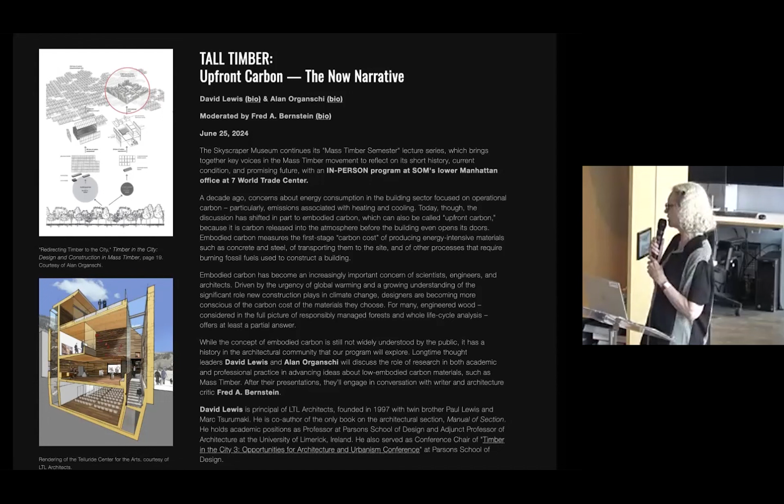I'm the founder, director, and curator of the Skyscraper Museum. We're really delighted to be here at SOM tonight for the fifth in the series of our Tall Timber lecture series, our semester of timber. This evening, Tall Timber, Upfront Carbon, the Now Narrative, brings together two great experts and academics who have investigated in their research, spoken at myriad conferences, taught hundreds of students, and organized academic conferences on mass timber and beyond that on all kinds of biogenic materials with low carbon footprints.

And I'm not the person to talk about this. The order of the presentations will be Alan Organschi and then David Lewis. So I will introduce them, and there'll be a moderated conversation, which was going to be in person with Fred Bernstein, a journalist who has covered mass timber and embodied energy, which is really his thing at the moment.

A kind of obsession with Fred. But Fred came down with COVID last night, so he is going to be here as a big head on the screen, and we hope all the technology is going to work out just fine. But I'm going to introduce Fred a little bit more when he comes onto the screen, and in our post-production, all of these things will be smoothed out.

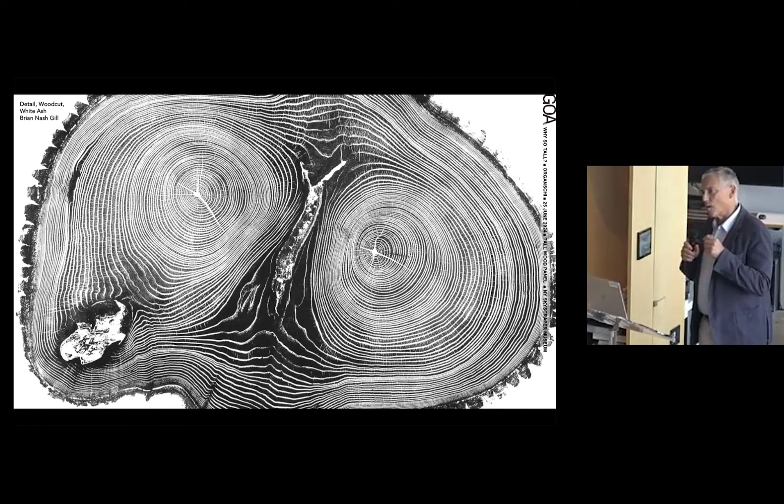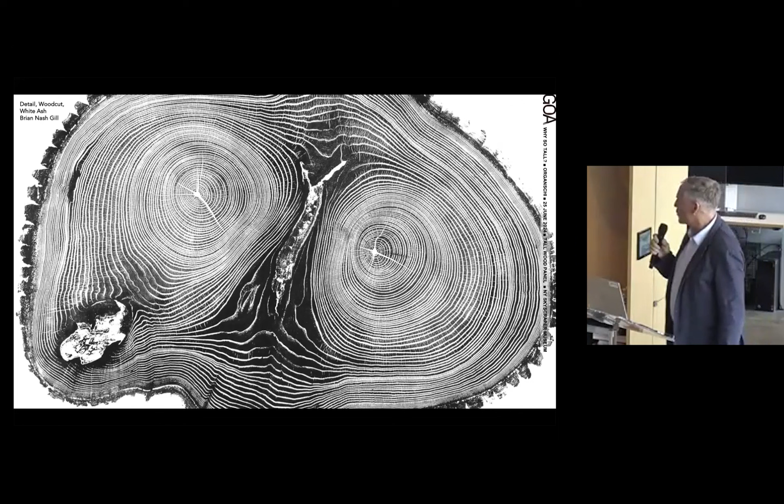We could talk about the architecture of wood. I'm not going to talk that much about it, but this amazing woodcut of an ash tree from Brian Nash Gill tells us a lot about two things. One, the sort of biophilic response we have to this natural material - we read the age of the tree, the disturbance in the forest as a kind of history, the flaws that we all experience. I just had knee surgery, so I'm feeling very akin to the broken knots and things like that in the tree. But also in this, we can read all of the reasons why wood historically has been left behind by 20th century engineers and architects because of the flaws and the lack of predictability and uniformity. So I won't really talk too much about that architecture.

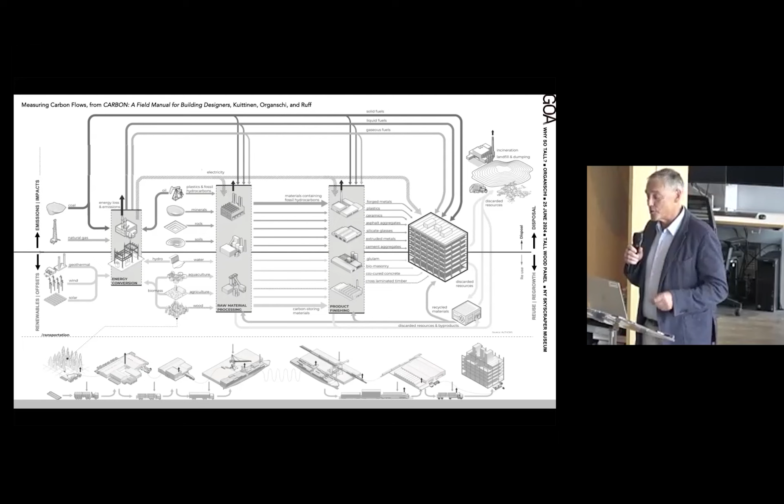And I'm going to talk a little bit about my architecture because, as Carol notes, we're always trying to sell ourselves a bit. But building architecture is a vehicle for some of these ideas, an important one. What I'd really like to talk about today is the architecture of the system that produces buildings and a host of environmental impacts throughout the building life cycle, from the extraction of materials from the Earth's surface or deep in its lithosphere, to the disposal of a building at the end of its service life and what happens to that material and all the energy that went into it - the so-called embodied aspects of building.

But first, I think I want to frame this question. This is Tokyo. Tokyo, as you know, is the largest population of any metropolitan area in the world, 39 million people I think. But an industrial ecologist will tell you that it's also the largest stockpile of human-made material in the world, which is an amazing thing to think about, because with the making of this giant city comes a host of impacts that we really haven't thought too much about. Carbon emissions is one of them, but we can trace it from the beginning, to the conversion of land and ecosystems to non-biomass surfaces, impervious surfaces, all the way down.

If we looked at some of the chips or materials going into the control systems in our buildings, we might find potentially human exploitation, possibly even child labor and exploitation.

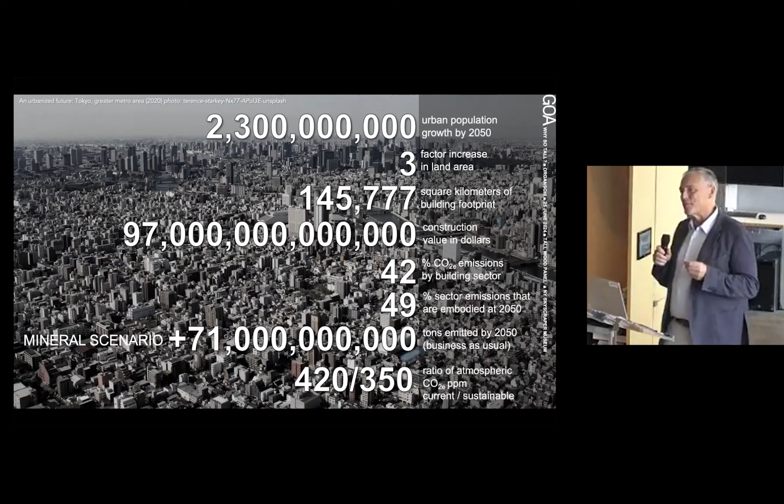In the process, we know now that building sector activity produces 42% of anthropogenic emissions. And by the way, that number has been climbing as we assess all the various levers in the system that create it.

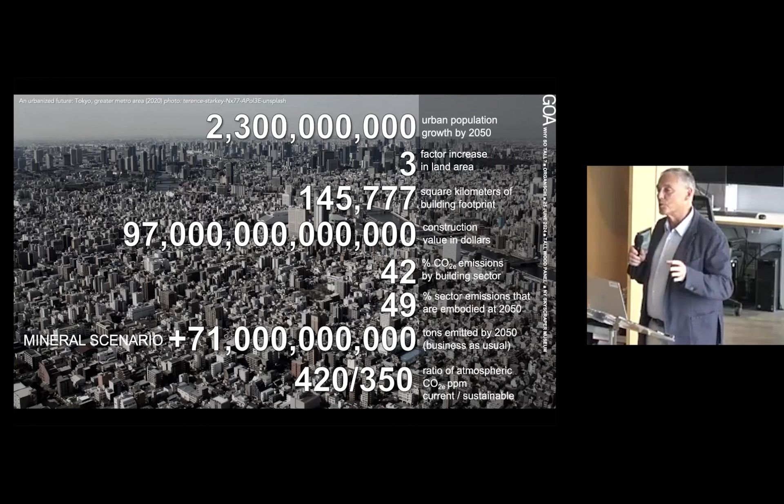I'll get more into this, but half of those emissions will be associated with embodied emissions by 2050, according to Architecture 2030. That's carbon dioxide alone, not counting other impacts, amounting to 71 gigatons of carbon. That will blow us through all the guardrails we've imagined for ourselves in terms of carbon impact reductions.

So this is a story about two landscapes: the forest, and its relationship historically, since the agricultural revolution, to the growing cities of human settlement.

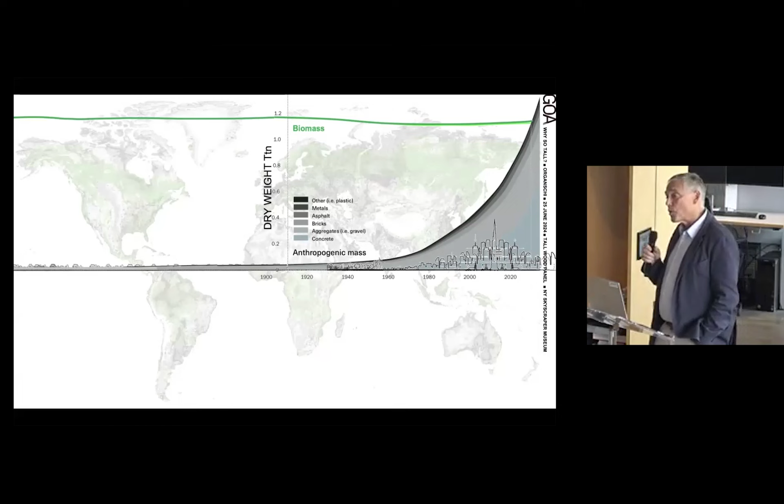If we think about Tokyo and all of that material, we can note that 2020 was a kind of red letter year. It was the point at which anthropogenic mass, all the products of the technosphere, now outweighs the Earth's biomass. That's a pretty important point.

We're also creating a lot of emissions when we dig this material out of the earth or scrape it off the surface. That's kind of what I want to talk about. But emissions are really a proxy for a lot of different kinds of impacts.

That number I mentioned, from a study by Architecture 2030, is that by 2050, 49% of building sector emissions will be associated with the embodied phase. Let's talk about what that is exactly: all the stuff that goes on in a building that's not operational energy consumption.

Here's one of the impacts created by that. Across the building life cycle, 23% of all the emissions we produce in the world are associated with the things we specify, the materials we specify in our buildings.

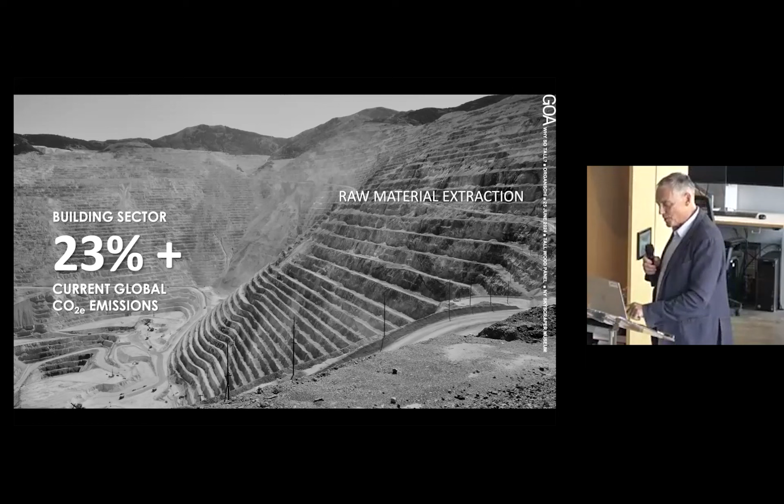Raw material extraction, material handling and transport, processing and manufacture. This is from David Plowden's amazing photo essay on Bethlehem Steel production in the 1960s.

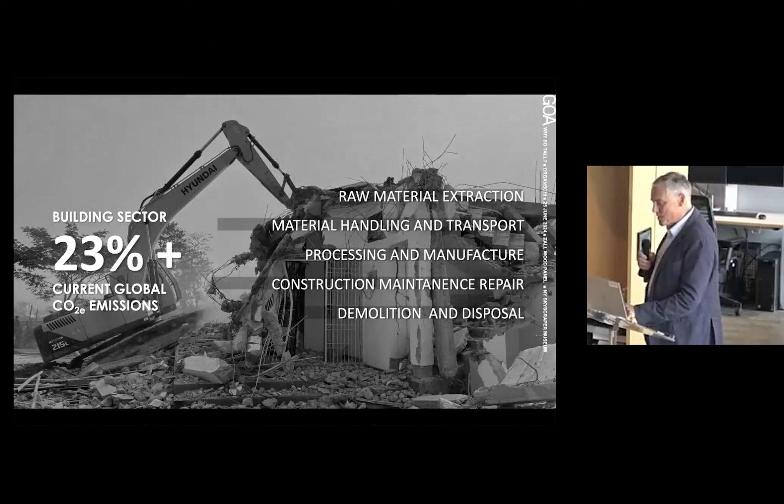During construction itself, and then renovation and repair, and finally demolition and disposal. These are all the kinds of forces behind the so-called embodied emissions of carbon.

So these are the operational emissions. The minute we open the doors and turn on the lights, the first time we use the building, we see a sort of slow emission of carbon. Even in the lowest so-called net zero energy buildings, we're going to have some emissions.

The problem, as Carol pointed out, is that at the beginning there's a carbon spike when we actually build the thing, extracting resources and transporting and processing them. Then it flattens for a while with embodied emissions, but the building needs to be repaired and serviced, and those emissions occur again. At the end of life, there's another burst of emissions because of the demolition and disassembly processes.

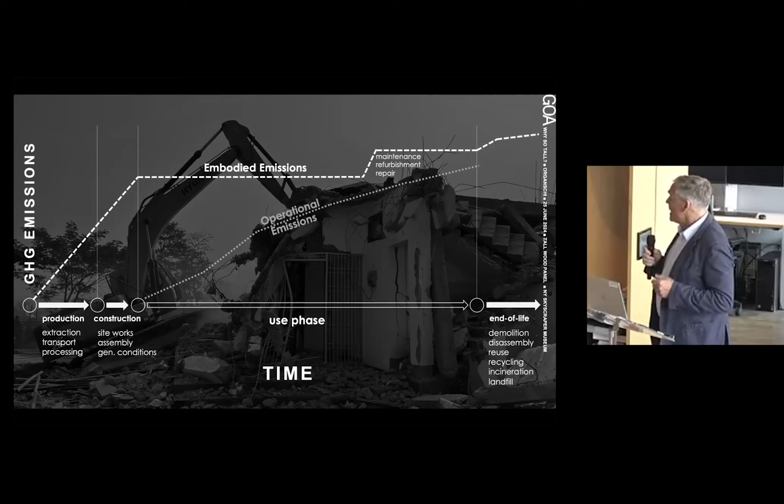So in a way, we can be really efficient about operational emissions, but we'll never catch up with the debt we owe the environment through this embodied phase.

We're pretty familiar with this diagram from the IPCC. We're charging toward our 1.5 degree guardrail. If we keep building and doing all the activities we currently do, in a business-as-usual scenario we'll blow through it, and the Earth will be a relatively difficult place to live by 2100, not too long from now. Of course, we talk a lot about decarbonizing different sectors, which will flatten that curve out, but we're still going to overshoot.

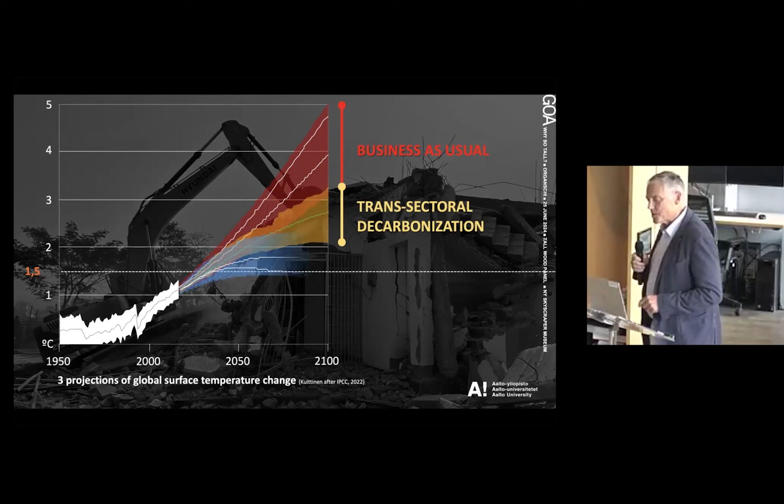So the question is, how do we produce negative emissions? How do we use a lever like the building sector and building activity to reverse this trend?

So the first thing is we need to really understand carbon literacy. I wrote this book with a couple of colleagues—I hope somebody's read it, or at least someone was willing to buy it. But it really tracks the question of where carbon is lodged in the Earth, both in things that existed naturally and in the future use of carbon-laden materials in building.

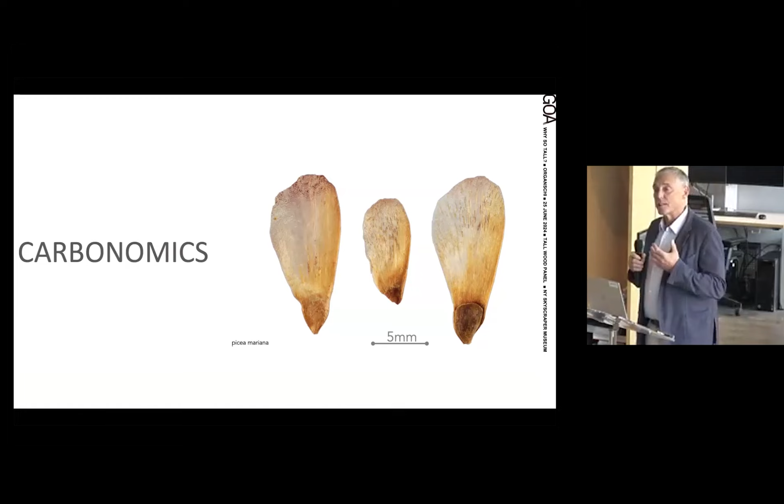This brought us to a real question we've been exploring through building. I'll get a little into my practice here—this idea of carbon as a kind of currency, where it's no longer dollars, renminbi, or euros, but rather the flow of carbon is actually an exchange that's a really important aspect of how we conduct our work.

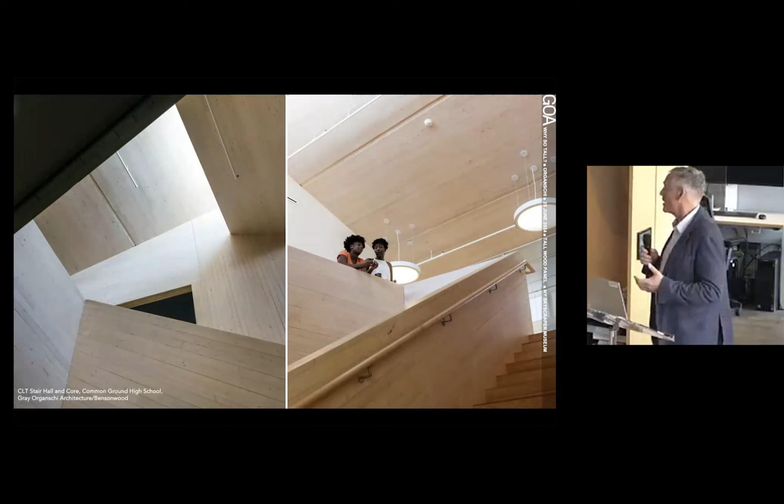So we built a school in New Haven for inner city kids at a public charter school, entirely out of CLT and bio-based materials. We learned a lot about the capacity of industry to prefabricate flat pack components, and got great feedback from the kids in the school—they said the building smelled good, which I think is a pretty good criteria for design.

Egress systems were made out of timber rather than steel pan stairs. In the end, the school was a pretty successful place, serving 20,000 people coming through the New Haven Ecology Project, along with the 250 high school kids who work there.

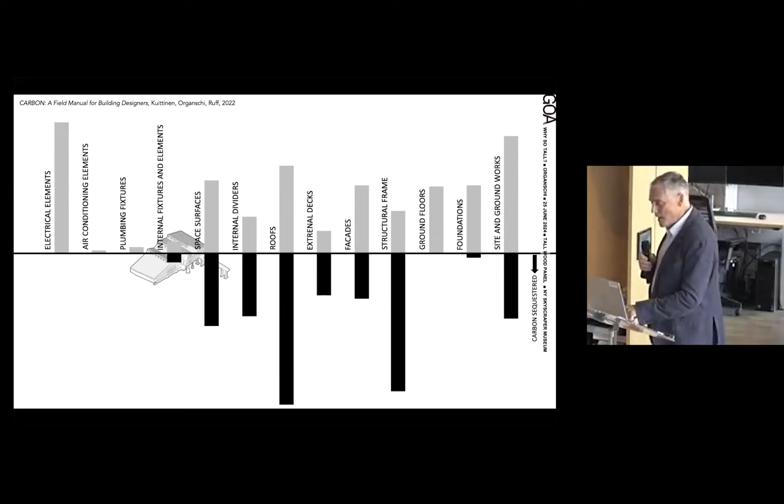I won't go into that too much, except to say that really the way we think of buildings as systems is how we specify components. When you look at it not as form but as a set of impacts, you start to see where emissions occur in the things we specify, and consider where there's capacity to store carbon using the natural photosynthetic process of forest growth—we start to really understand how buildings can be agents in the reversal of climate change.

With this student, a young guy, we did a study of how much carbon was lodged inside this building based on the bio-based materials. We found it was essentially about 100 cars worth of annual emissions offset by the carbon stored in the wood of this building, which I think is an important insight.

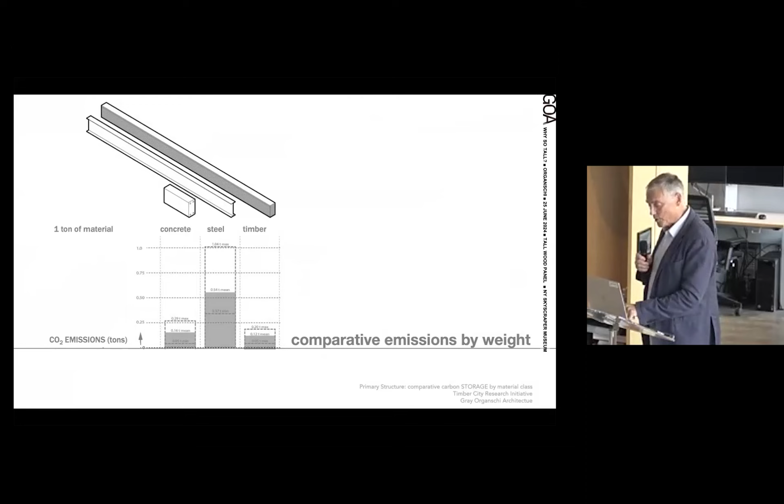If you start to scale up, you imagine how that goes. For comparison's sake, we often talk about the comparative weight—carbon dioxide emissions per weight of material. But if you take into account the relative strength, or the strength-to-weight ratio of these materials, you see that wood will get you 4 times as much value, plus has lower emissions. So we start to see great benefits in emissions reductions from the use of wood when it's done properly, from regeneratively managed forests, of course.

The storage piece is a really important thing that became part of our Timber City research initiative—unlike mostly concrete and not at all steel, we can actually store carbon in these kinds of structures for as long as they're protected.

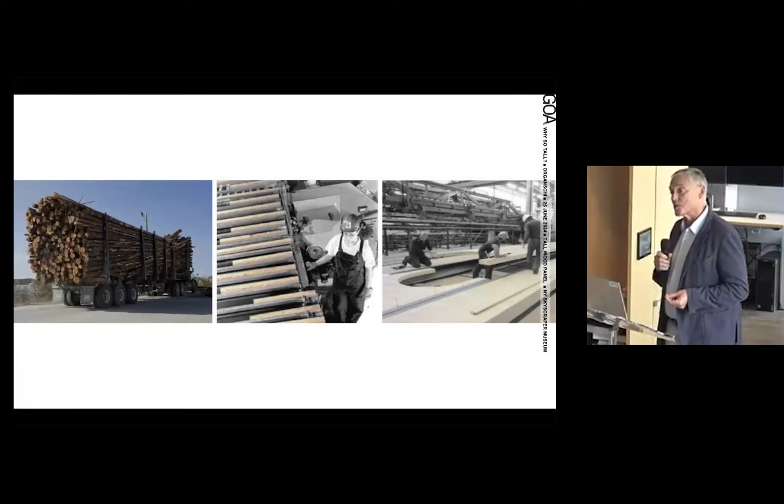It's kind of amazing that chemical adhesives, combined with a technology called finger jointing, which is about 100 years old, let us take little sticks of wood—higher yields from managed forests, smaller trees being cut—and produce really big cross sections.

What's more, we can distribute the different lamella, or layers, within that based on their capacity for structural resistance. So the really good fiber, the high-grade fiber, gets moved to the tensile and compression edges of a beam, let's say, and the cheaper stuff gets lodged in the middle. So now we're actually truly making a better beam, and we've known how to do this as long as glulam has been made. And of course, we know it's very amenable to digital fabrication systems.

And we even know that we can start to substitute different species that are underutilized, like beechwood, in this case of beechwood dowel joinery for a 5-story building produced by Blumer Lehmann in Switzerland.

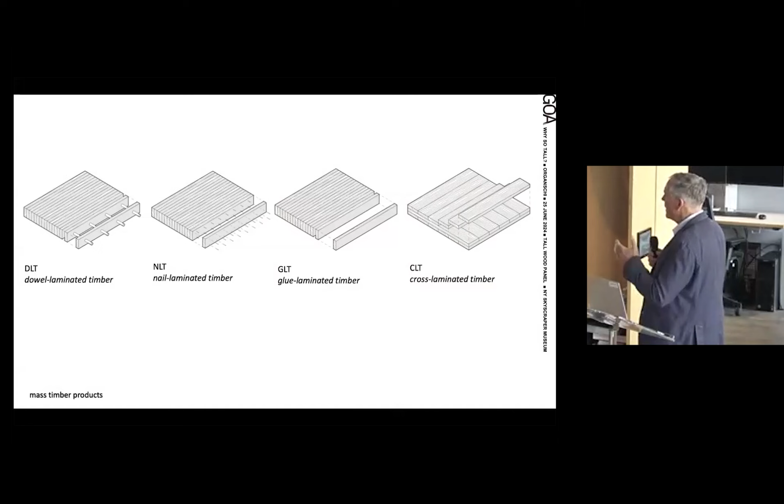We can start to actually choose different species based on their properties from the forest and apply them to tall buildings. So think about it: it's a tectonic system where we have a bunch of sticks, and we found different ways to put them together to make pretty large components.

And tectonic systems of building, we've allowed them by building code. The IBC allows buildings with different kinds of encapsulation requirements up to 18 stories, which is 3 times what we were allowed to do with heavy timber prior to the IBC code adoption. So the question becomes, if we can do all this, is building wood skyscrapers what we should be doing? That's kind of what I'd like to talk about today.

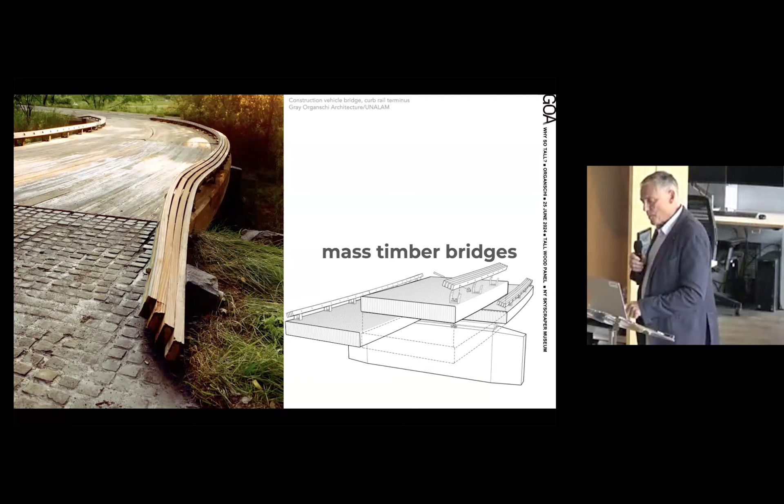And that's where I get to talk about my practice a little bit, which is that we've been working on mass timber for a pretty long time. This bridge we designed was made in 1996, and it was a first experiment with just the industrial techniques required because we were building the bridges ourselves and we had to figure out the logistics.

That became a series of experiments through different kinds of bridges, again self-built, self-performed, where we were really focused on how do we move this stuff into the site, how do we put it together, how do we ensure that it's going to be durable, how do we maintain structural integrity in really slender, light systems.

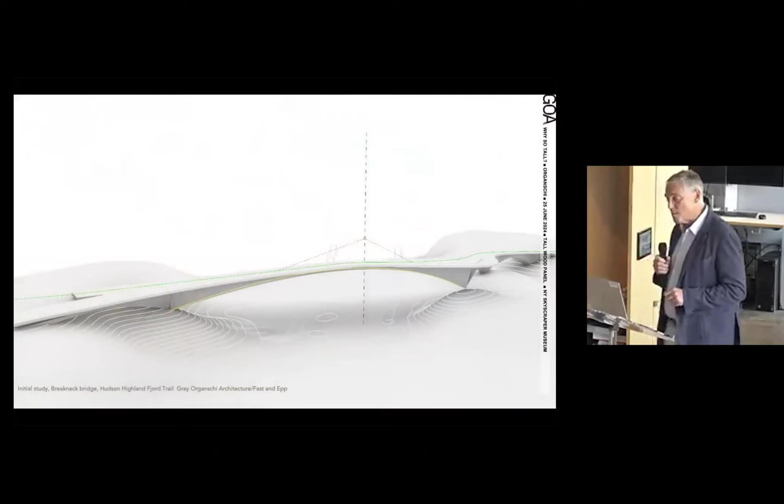But are monolithic and therefore fairly weather resistant over time. And then that's turned into bigger projects working for a sort of alphabet soup of different agencies along the Hudson River, crossing the Metro-North Railroad, using a hybrid system of timber, steel, concrete, knowing full well that that is really part of the sort of transitional aspect of engaging these mass timber products.

And houses have been important to us as a way to test systems of building, from the cabinet detail, laminated curved laminated wood, to exterior cladding and structural systems, how we retrofit buildings, which is such an important part of the decarbonization process, to urban buildings that were really unused and neglected, and turn them into rich, carbon rich and architecturally rich places.

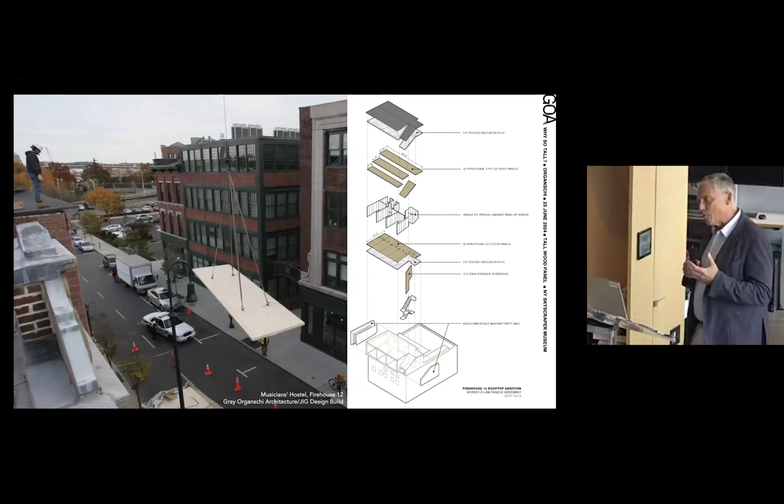But also then, what does it mean to move those same materials into the city and handle that without creating a huge amount of disturbance? Or in the case with the Acme Lofts, which we worked on with Jeff Spiritos, who's here tonight, the idea that this super light, stiff material can actually reinforce an unreinforced historical masonry building, just using a shaft that's threaded down to its foundations to literally double the capacity of a historic building in terms of housing.

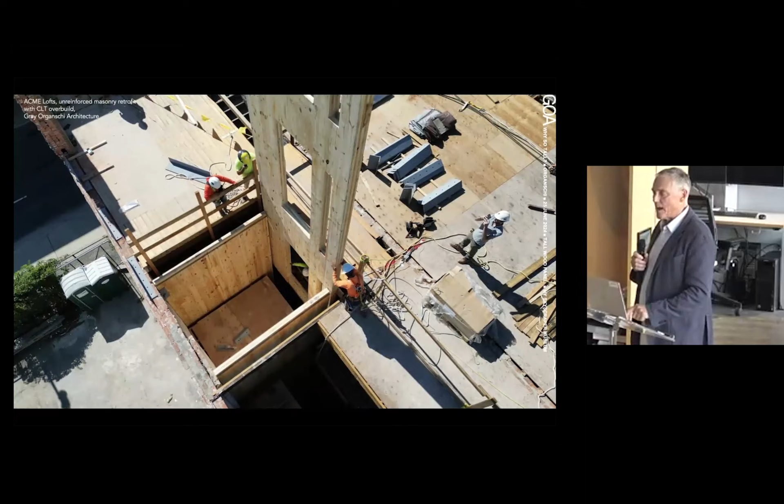And then the question, of course, when you start making housing is, can you make affordable housing? I'm jumping ahead, sorry - you got me under pressure, Carol, so I'm trying to move fast.

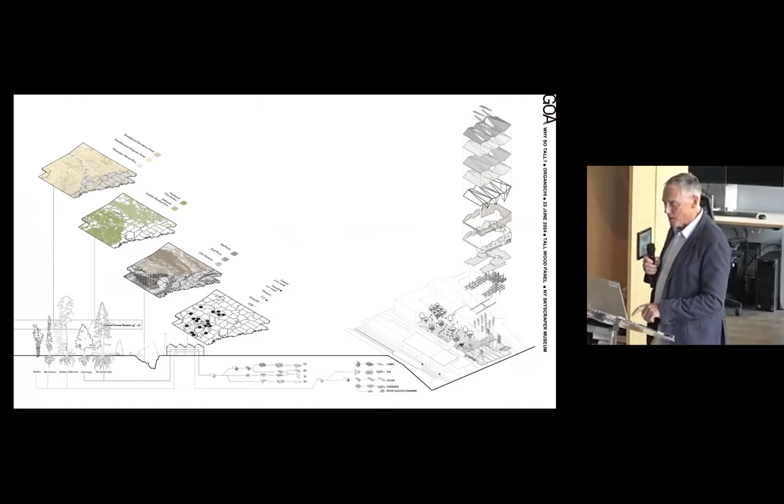This is an important piece, and I'm going to really let David talk about this, but the buildings that we make, especially for educational institutions, become test beds for both education and industry, and that's a really important piece. But it has to address not just the building itself and the cool forms and techniques that we use, but rather the entire system, as at the Anthony Timberlands Center in Arkansas, where we looked at the entire material shed that could possibly serve the building.

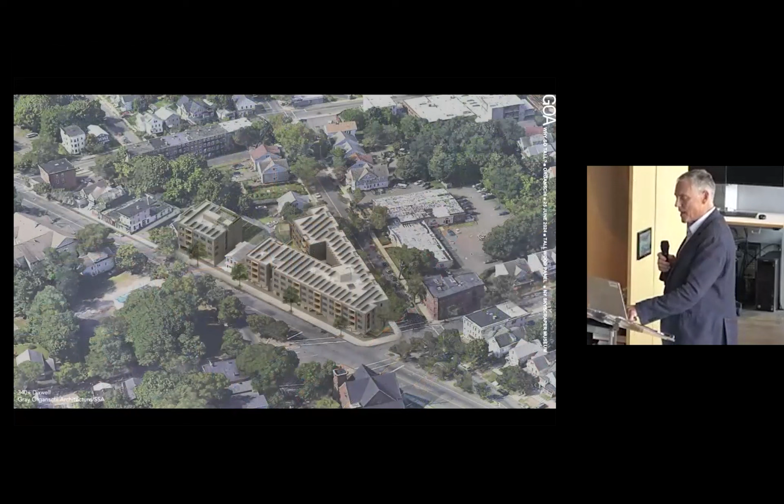And also revitalize a moribund economy in the country, in the state. And affordability, also working with Jeff Spiritos in New York and his great analysis for the US Forest Service of comparative costs of building and how to make a building entirely out of bio-based materials and make it affordable for a community much in need of housing. This project's going to be finished shortly, and it has been a test for a lot of reasons, which I won't go into here.

And then finally, at a more national scale, we're working in Thimphu in Bhutan, working with the government to try to not just make a building, but to refashion the entire supply chain based on the sustainable use of resources. And how to do that and be respectful of a very strong architectural tradition, working with regional architects, national architects, and really studying how we might create cascading products coming out of the timber, the sustainable timber industry, to really create a whole host of parts of the building assembly.

And this requires us to analyze how much demand there could be in the future, and also how much capacity the forest management units in Bhutan have to produce timber, because that's a really important part of it.

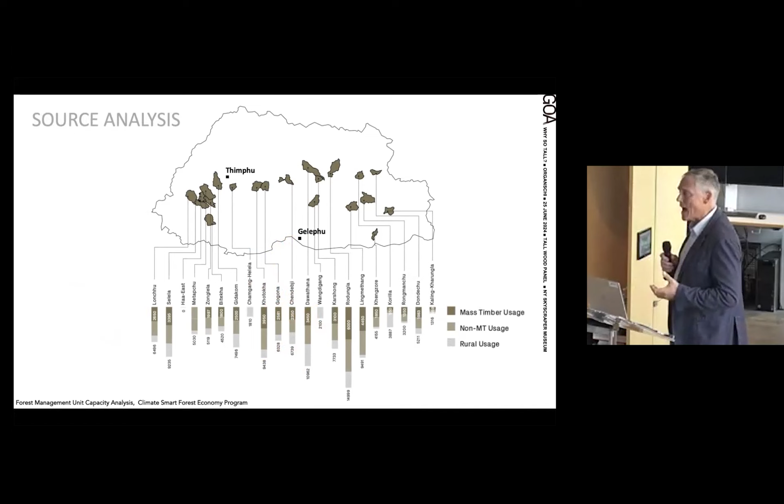We have to be sustainable systemically. And so that brings me to the vision we've tried to promote: that there is a synergy between these once antagonistic systems and landscapes, the city and the forest.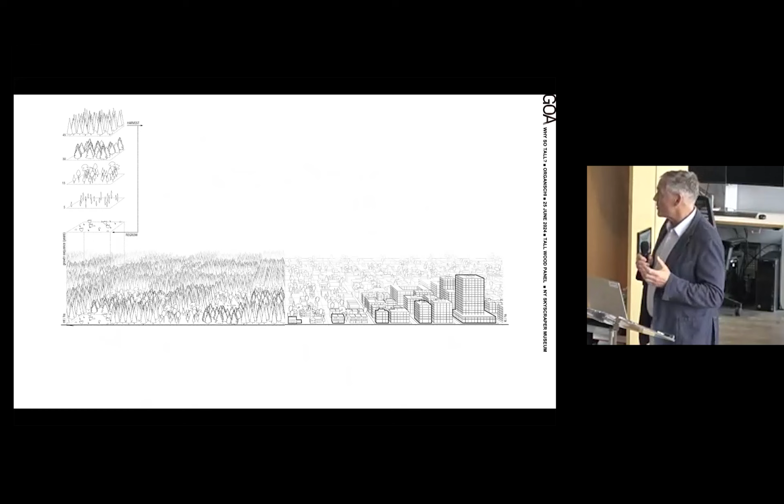We can build synergies first by understanding regional forest differences and the species coming out of them, and as stand successions follow a disturbance like wind throw or a harvest, how the wood grows and what species grow at different stages, and then how we might track the carbon stored and potentially the biodiversity benefits coming out of it.

And how we might map different products from the forest and this forest dynamic into both low-rise building, which we already know how to do pretty well, but more importantly into mid to high rise building, where we start to see real benefits of this transfer of forest carbon into these durable consumer products that we call buildings.

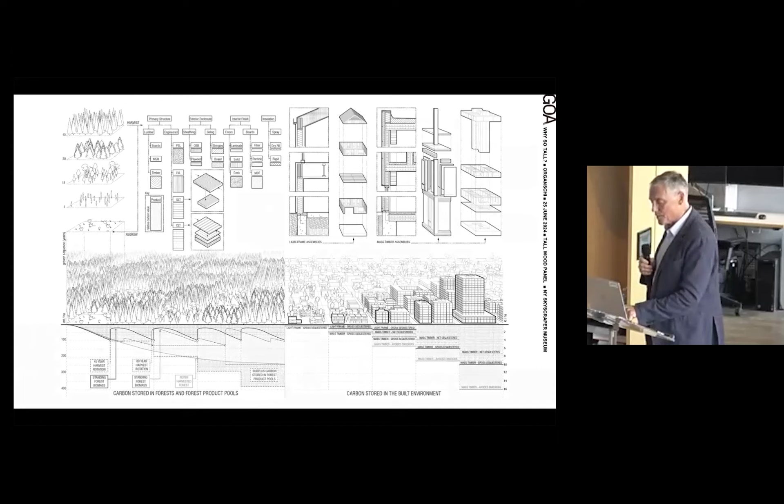So what we're really positing is that there exists scientifically, experientially, a metabolic, circular, and regenerative system called forests. Can we mimic that? And through really good quality building that's carefully assessed, can we also produce a metabolic, circular, and regenerative geotechnology?

It's a bold move. I don't think it's necessarily going to happen. I think a lot of people are concerned about the health of forests for good reason, worried about the overconsumption of wood to build cities.

We know the carbon sink globally is collapsing for a whole host of reasons. Wildfire is the most journalist-friendly aspect of it, but there are many other reasons for forest loss—agricultural conversions are raging across the Amazon and Congo, mining and mineral extraction is happening.

Forest product use represents a part of it. About 20% of global forests are used for wood products. 50% of those are actually domestic fuel. So that's something to keep in mind.

Suburbanization is obviously a huge force in land conversion. And finally, climate change is doing it too.

What's important as we look at that—we need to understand a recent study from my colleagues at Yale and the Applied Science Synthesis program showed that if we stop cutting, the carbon sink collapses, because of all these other forces. If we don't cut and see these extreme disturbances, it collapses even faster.

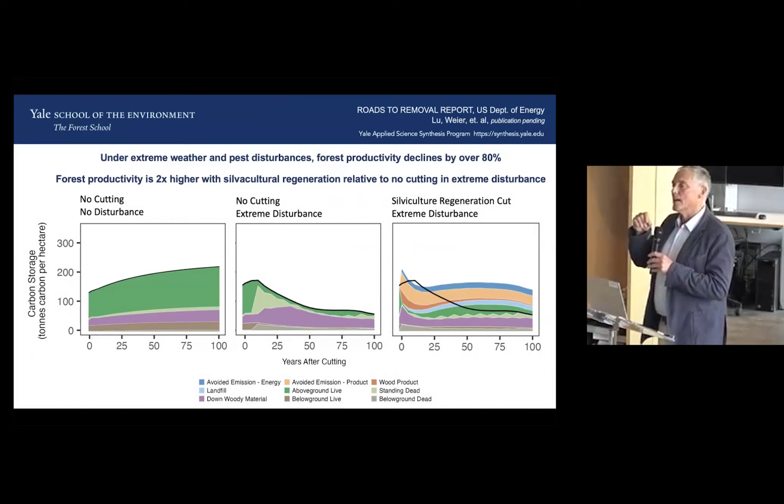So this is the no-cut, no-disturbance scenario, which actually doesn't exist. This is no-cut, extreme-disturbance, which does exist. And then this is the regenerative cut, which is really the only way. The focus on existing second growth forests, restoration and management, really is the only way to maintain the forest carbon sink.

We've got to get rid of industrial forestry—it's not the way to manage forests. Unfortunately, it's the way we pretty much cut forests for the current mass timber products we use. We have to think instead about what the forest can offer us on a sustainable level.

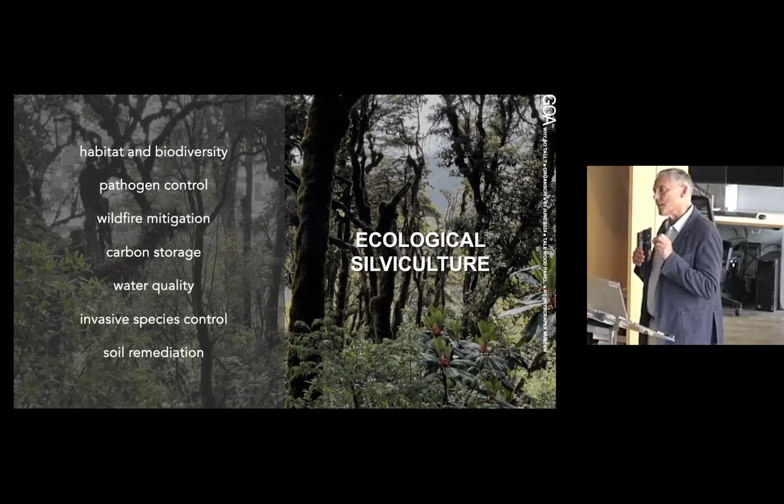We have to think about all of the forces and goals of forest management—habitat and biodiversity enhancement, pathogen and invasive species control, carbon storage in the forest, water quality improvement, soil remediation—all of the things ecologically minded foresters are thinking about, we can think about in the specifications of building components.

And we need to teach our students how to go into the forest and understand that, even though they may be architects or builders. We need to carry that through the entire process, from the sourcing of that material to the making of buildings.

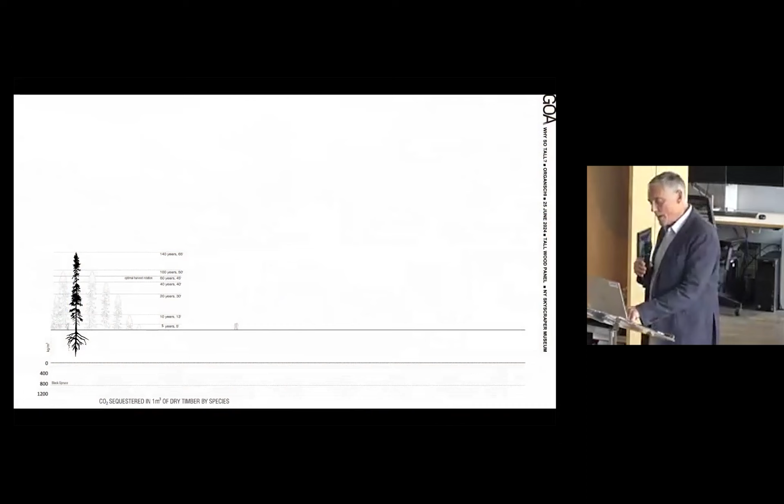We can look truly at how the forest grows, the different products coming out of it, how long they need to grow before they're cut, when they're near the end of their life, how that mortality plays into different models of soil remediation and biodiversity enhancement, how to use the products in novel ways, and how to map them onto buildings. When we do that, we can start to see benefits across the system.

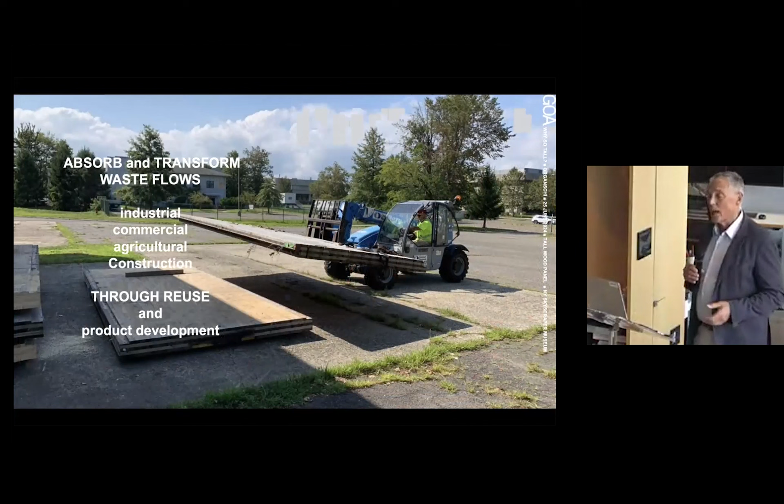Got to stop our extractive economies in building. We have to use circular economic means to solve building problems, because wood won't do it alone. We need the support of the waste flows from different sources. We need to transform them. We need to reuse them for product and make new products out of them.

You know a lot about designing buildings as material banks and design for disassembly, but we have to develop scenarios for the reuse of those materials when we design, which is a kind of future-proofing of the building system and the life cycle. We have to stop tearing down buildings without really assessing what we're losing in terms of the embodied emissions already held in those things.

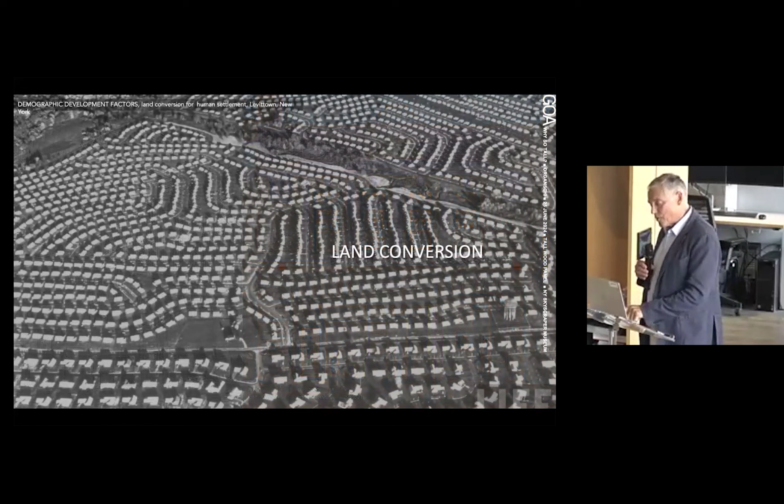And we have to stop land conversion by reducing sprawl and increasing what I would call convivial density. So there's so many benefits that come out of well-placed density, which doesn't always translate to height.

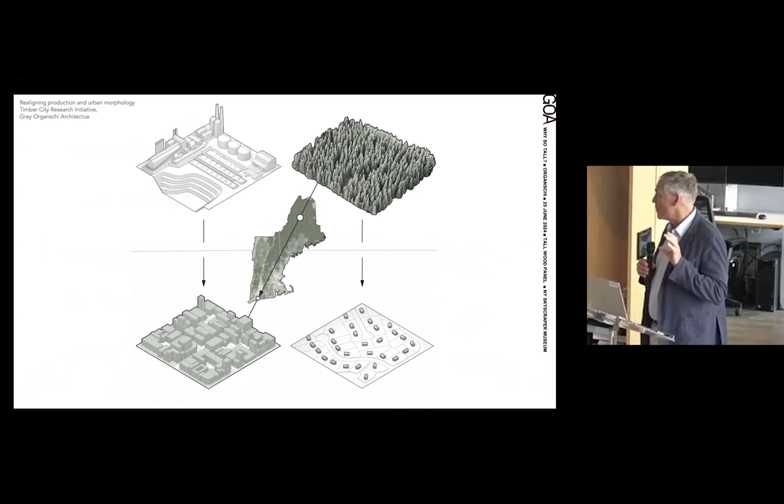We're really good at governing within political boundaries, but that doesn't really help us manage resources. So we have to think bioregionally. And we can do that by breaking the sort of stranglehold that exists between mineral-based, fossil fuel-intensive manufacturing processes and dense, convivial city building.

And we can map every bioregional component onto buildings. This will become part of the new design criteria for our students. This means rural workforce opportunity. It means indigenous enfranchisement of indigenous communities. It means urban workforce opportunity. So there's a socioeconomic, cultural component to this as well.

It's a big lift. It's a confusing diagram to think about decarbonized design. But this is really how we need to function. And we need to understand the decisions we make may produce either a high carbon emissions building or a low one. And this is one of the questions for tall building builders.

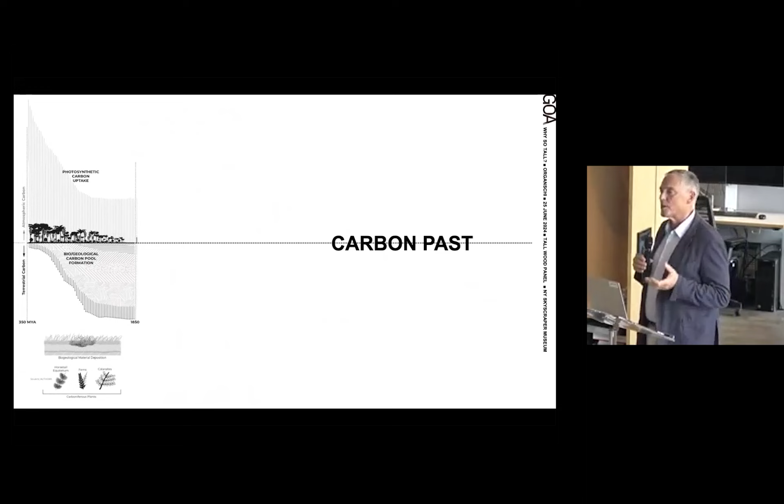So I'll close with this carbon timeline: 350 million years of sequestration in global forests during the Carboniferous era, 150 years where a lot of that fossil hydrocarbon was excavated and burned, combusted for energy and for making material.

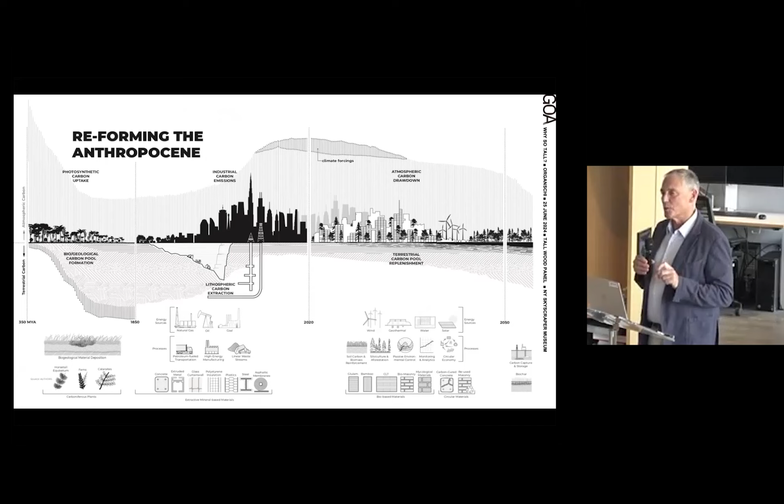So the question is, can we actually reform our practices, the Anthropocene more broadly, and try to use all of these different techniques, systemic in nature, to solve the problems? And if this is our motivation, rather than just making the tallest building, then I think tall building is the answer. Thank you very much.

Thanks, Alan. I'm going to try to tell a parallel story, but it's critical to understand what Alan is sharing in the range of approaches that come into play, because it's also one of the challenges of introducing mass timber within an educational framework.

So I'm going to start by asking you to begin by thinking where you were a dozen years ago. This is pre-Taylor Swift, I think.

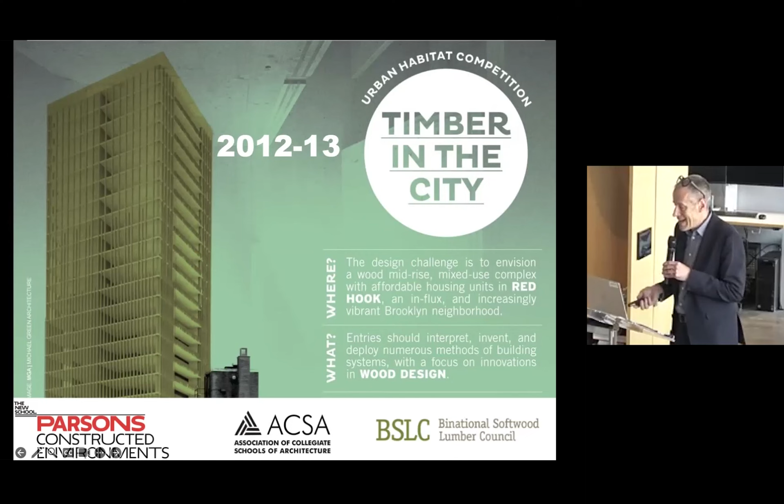In a short history of tall timber within education, at that time, Parsons received a grant from the BSLC, the Binational Softwood Lumber Council, in collaboration with the ACSA, to organize a two-part event. First, a New York-based conference, Timber in the City, bringing together experts, architects, engineers, developers, and ecologists to examine how to build mass timber projects in dense urban environments to address the looming housing crisis.

Sound familiar? The conference would be followed by a student competition to envision a wood mid-rise mixed-use complex with affordable units in Red Hook. My colleague, Andy Bernheimer, organized this conference and competition, gathering together Andrew Waugh, Michael Green, and Case DeJager as the speakers.

The conference set up the competition, providing key information about what mass timber is for an audience that didn't really know much about it. Following the 2008 subprime housing mortgage crisis, this work was in part motivated by a desire to diversify market opportunities for softwood framing, expanding now into mass timber that had been standardized in Europe already.

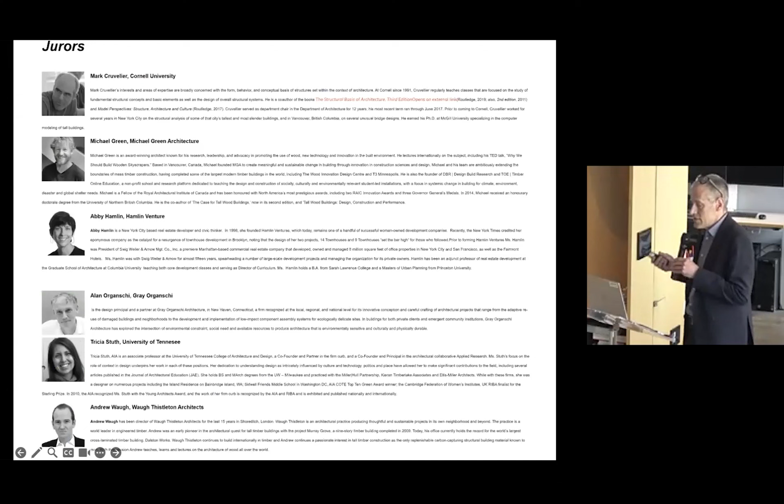The competition brought together an esteemed panel of jurors, including Alan, Abby Hamlin, Tricia Stuth, and Mark Cruvellier, as well as Michael Green and Andrew Waugh. The competition enticed over 1,000 students, right? One of the largest that the ACSA had seen, and generated significant interest, including introducing students and educators to systems of mass timber.

Mostly CLT construction, many for the first time. The competition focused on assembly systems, with the winning entry embracing the prefabrication of mass customization embedded in CLT production. That's a really important thing that is also a problem.

The results of the first Timber in the City were edited by Andy and published in the book of the same name, with expanded chapters to include mass timber productions from around the world. Also worth noting that the same year, 2013, SOM published their Timber Tower Research Project, which is also featured in the exhibition, the Skyscraper Museum.

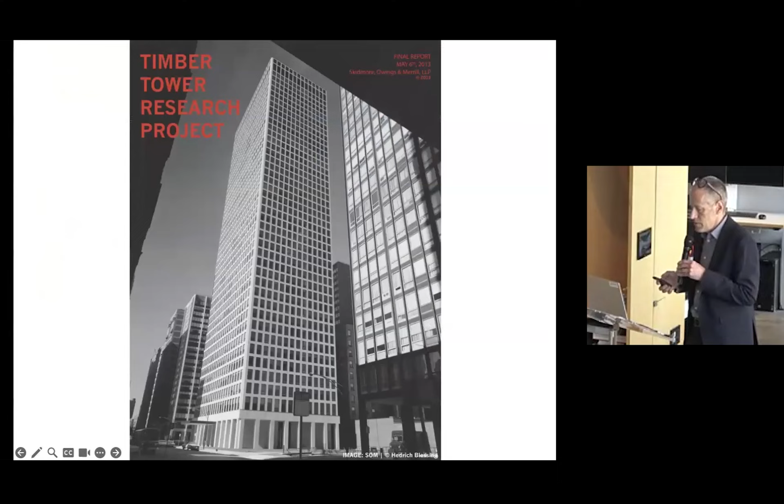A few years later, Parsons ACSA and Binational Softwood Lumber Council ran the second Timber in the City competition, this time with a site at Essex Crossing, with a focus also on affordable housing. Alan Bruton served as the conference chair, bringing together Susan Jones, Tanya Luthi, Jeff McClellan, Tom Robinson, Amir Sharoki, and Jeff Spiritos to address the question: what's holding timber back?

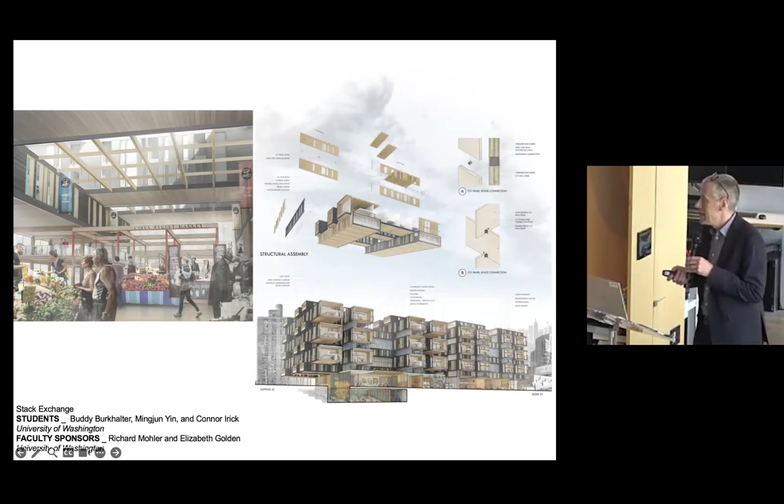This is 2016. The competition continued to gather great student interest, with the winning team from the University of Washington. Note again the focus on details, assembly systems, and prefabrication, and the embrace of the aesthetics of wood.

Two years later, we ran the third version with a site just near the Queensboro Bridge, expanding the focus to emphasize material health, informed by the work of the Parsons Healthy Materials Lab. I organized that year's competition and conference that preceded it, including presentations by Andrew, Tom Chung, Michelle Roloffs, Bill Browning, Merritt Buchholz, Allison Mears, David Linehan, Annie Perkins, and Todd Snap.

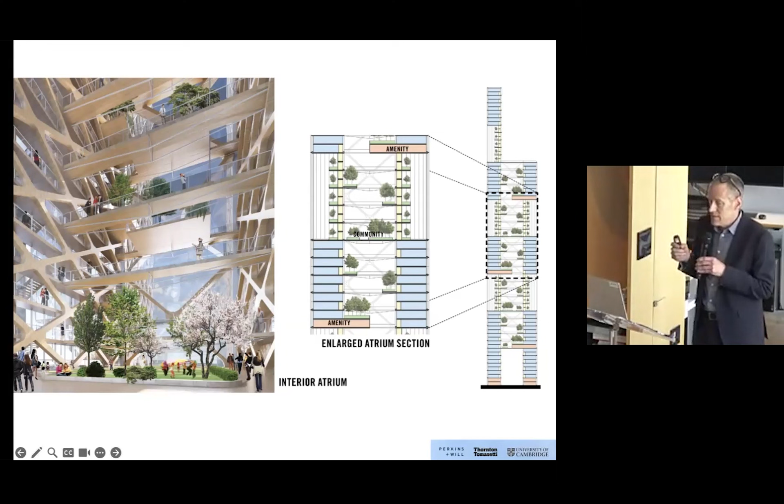Todd presented then the recently completed research on River Beech Tower, currently featured in the exhibition. It's important to note that it wasn't just the demonstration of the use of mass timber for high-rise construction, but what I found really interesting about the project was that it was using assembly and construction rather than a substitute model for framing systems from steel and concrete.

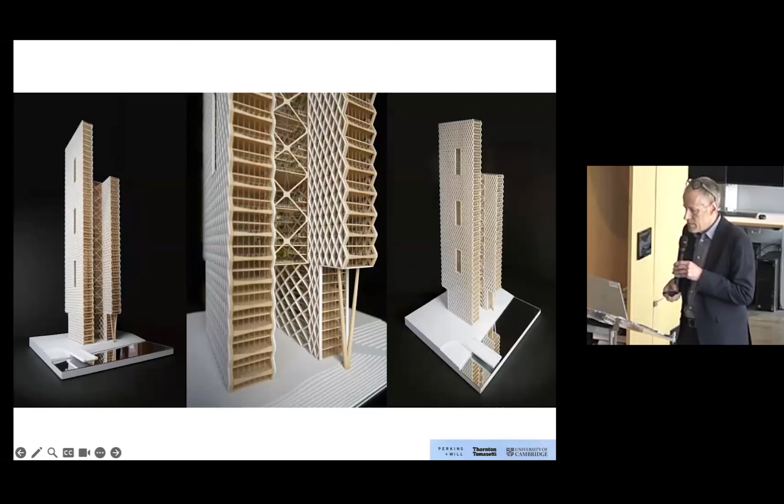In fact, this was a change in the maturation of the way to think about mass timber, linking the shape of the tower to the facade, to its assembly, to its timber joints as the possibilities for formal development. The best student projects explored similar tectonic opportunities of mass timber, while addressing the challenges of building adjacent to the bridge.

However, students didn't do as well to address the issues of health or the broader regenerative or biophilic issues that were embedded in the project. This point is critical as an issue I want to raise here and moving forward.

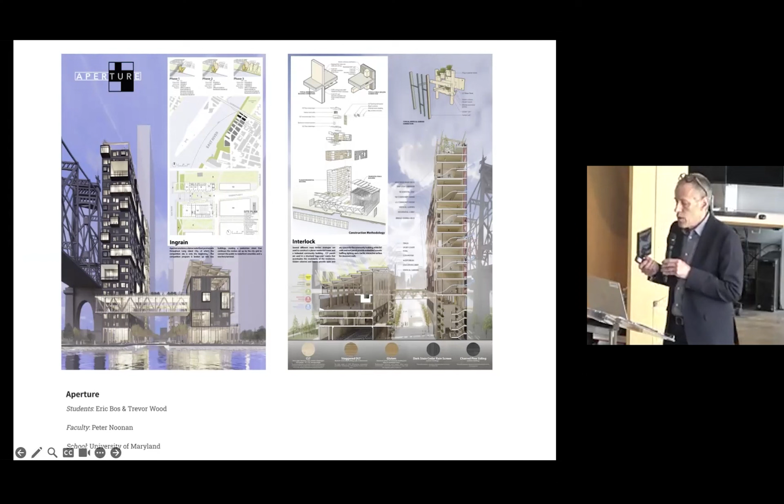With little over 10 years old, these competitions now feel slightly missing a key piece, namely the change in the way we conceptualize and understand materials that Alan has so eloquently spoken about. While detailing assembly and using new mass timber tectonics, these competitions did not fully address where the timber came from, how it was harvested and processed, what the health consequences of the full material assembly are, and how it would be disassembled and where it would go after use.

12 years ago, the understanding of the role of embodied or upfront carbon was not as central to the discussion as it is now, nor did the competitions challenge students and faculty to fundamentally change their conceptions of the role of the architect, to go from specifier of pre-made and prepackaged materials, including mass timber, to ones who can embrace, explore, and represent the full life cycle of materials to transform the way buildings operate dynamically as part of regenerative ecological global systems.

As an aside, you can find all of the materials from these early competitions here. ACSA has continued to run subsequent Timber in the City competitions independent from Parsons, but notably without the important, from my perspective, conference gatherings to set the stage and set the information for making substantial change.

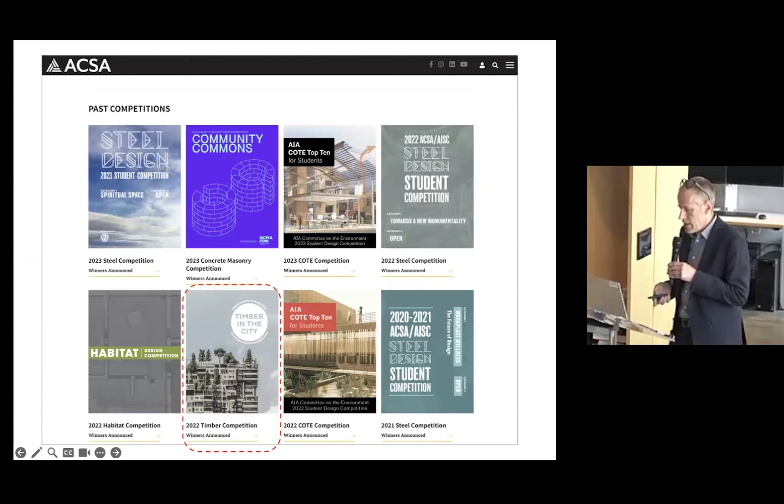I'm going to quickly rehearse, in a slightly graphically different version from what Alan did, to argue for why this conceptual framing of the architect needs to change. One is looking very clearly at the amount of CO2 equivalent. Our current policies, as Alan has mentioned, are not sufficient. Targets are not going to be met. Currently, we need to reduce by 65% by 2030 from 2024.

This demands radical change. And while emissions dropped during the global pandemic, they've kicked back up again, meaning less time and need to accelerate change. Buildings are 39%, increasingly data is showing closer to 42%, of CO2.

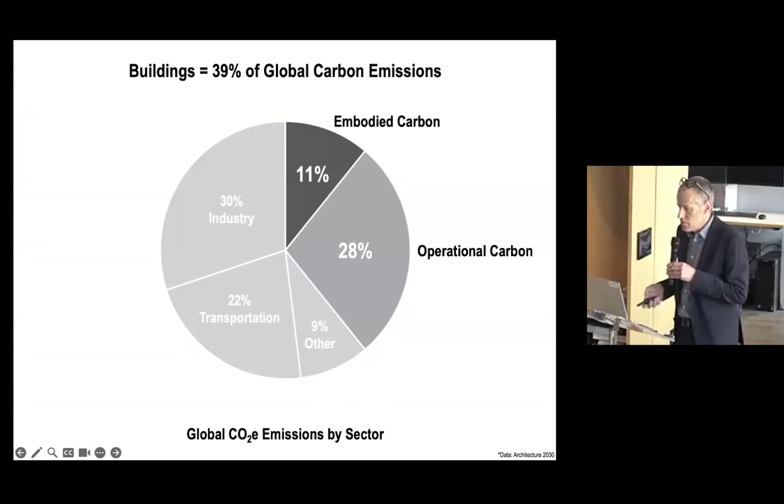The emphasis has historically been on operational, not embodied carbon. About 50-50 of a new building is between operational and embodied. A highly efficient building clearly starts pushing that far more into embodied. The key question is the issue of time—the time we need to address now is the embodied carbon. The operational can be addressed later.

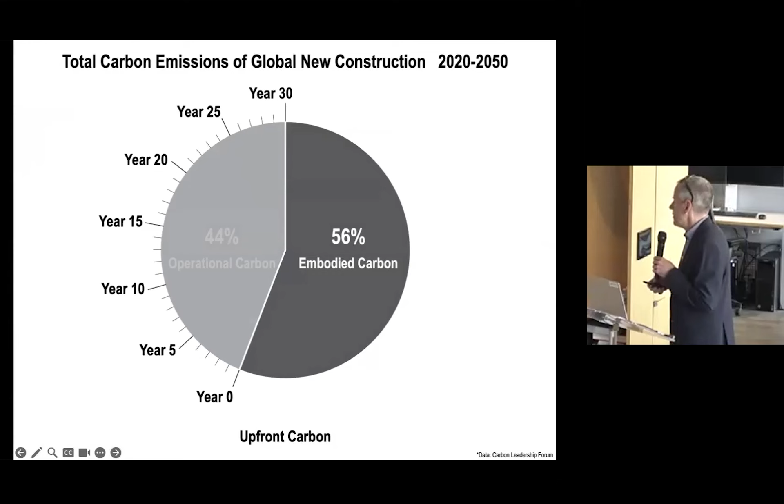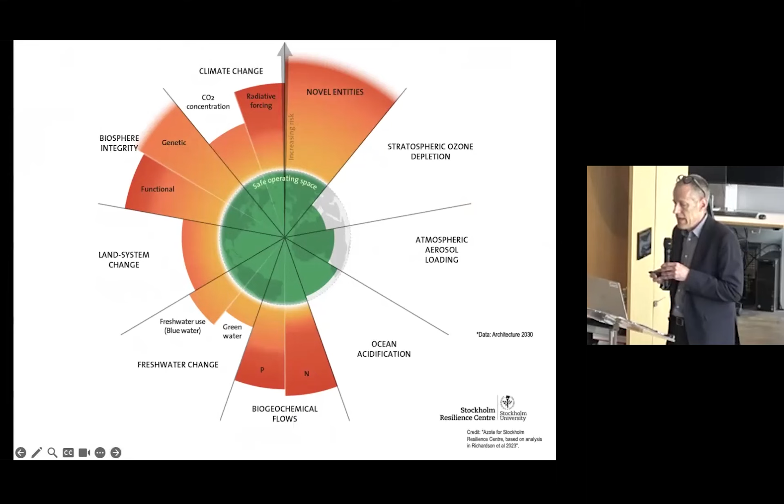Simultaneously, while embodied carbon and climate change are critical issues, they're only one measure of humans' impact on our capacity to exist within the limitations of the planet.

As mapped by the now 9 planetary boundaries, a measure used by the Stockholm Resilience Centre to demonstrate areas including biodiversity, water, chemical loading, ozone depletion, aerosol loading, ocean acidification, land change, and biogeochemical flows. As of last year of human inhabitation, we are now exceeding 6 of those 9 boundaries.

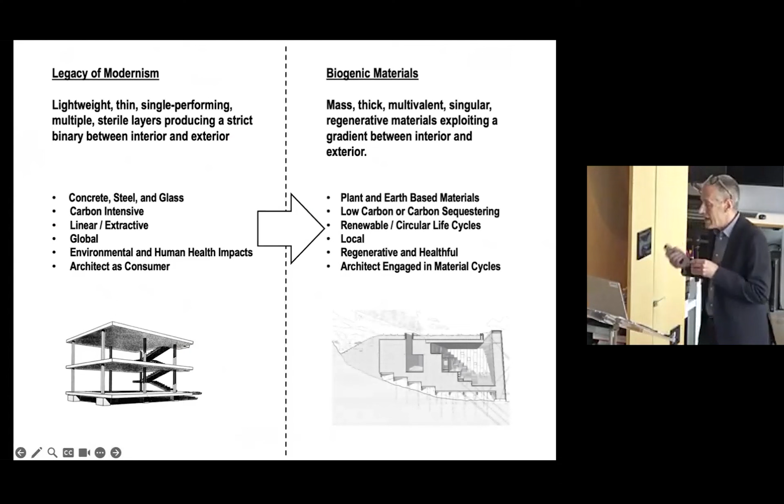What does this mean for the constructed environment and the practice of architecture? I think it's an imperative to move beyond the material, aesthetics, and cultural values of global modernism, including utilizing timber under this very framework. Simply substituting timber won't be sufficient.

Need to move to biogenic and geogenic materials that support renewable and regenerative cycles. On a formal level, this means moving from thinness to mass—thick, multivalent, singular, regenerative material systems that exploit a gradient between interior and exterior, as opposed to an interior and exterior.

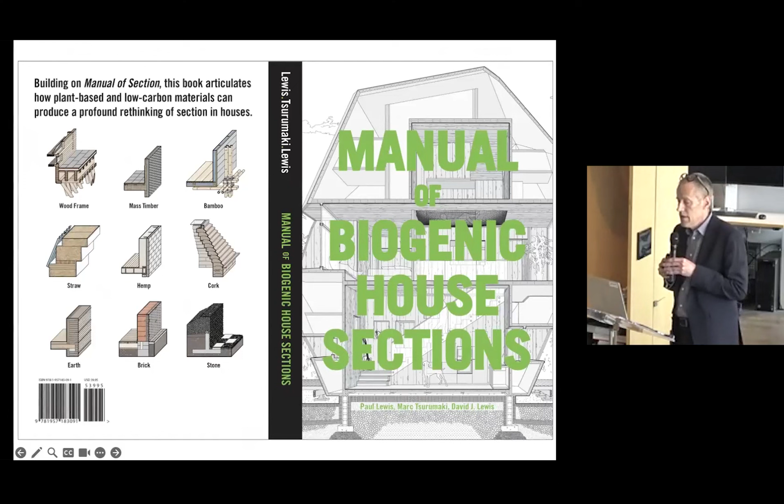A year ago, my partners and I, recognizing a gap in accessible information to students, architects, clients, and builders, published this book—a follow-up to Manual of Section. It's a rethinking of the material basis of buildings, demonstrating a new paradigm for architecture, and an outgrowth of our frustration with a consumerist understanding of materials informing design practices and built into many of the digital modeling softwares.

9 chapters based on viable materials, and a final chapter on reuse, critically important. They showcase through 55 small houses built around the world that have already been realized, to explore that the material and formal opportunities not only exist, but can be deployed, illustrated, and examined through section.

Of the biogenic materials, it's also important to note the time and time pressures previously mentioned. Different growth cycles exist for these photosynthesized plants. Interestingly, while trees take 30 years, current agricultural crops such as straw and hemp operate annually, if not biannually.

And this time question of where we're going to get our resources is tied exactly to the time question of the embodied carbon upfront versus the operational carbon over time.

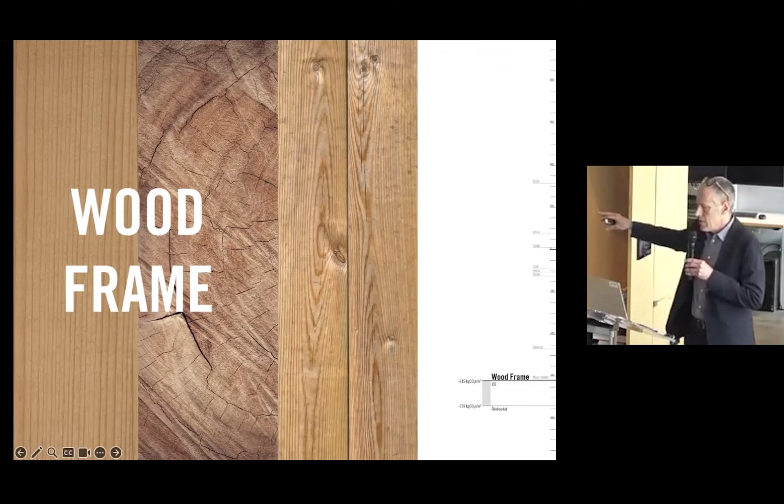I'll show that in general all the chapters follow the same framework: introducing the material, describing the rough approximate sequestered carbon, and then providing—this is key for the educational framework—a clear circular diagram so that students and others can understand not only how the material was grown, but also the construction cycles and the relationship between growth cycles and construction cycles, as part of the changing way of going to a circular way of thinking, as opposed to a linear extractive waste process.

With wood framing, we also want to put into each of these chapters how it goes from the plant-based system into the products, and how those products drive a way of thinking about construction.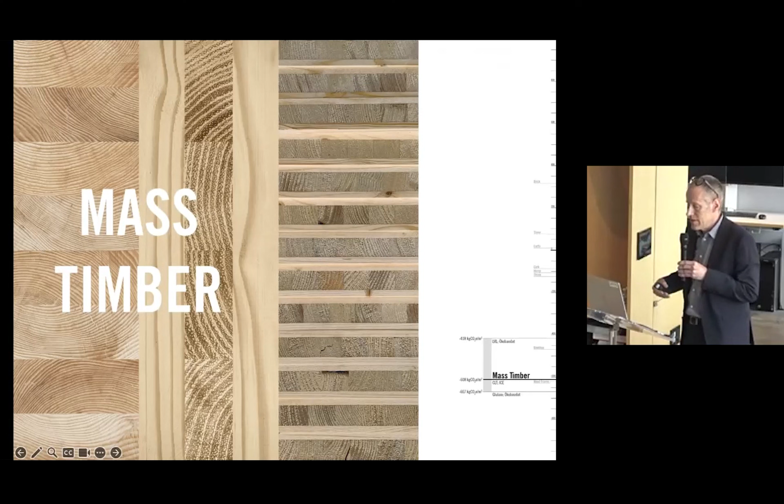Mass timber in many ways is the poster child for the plant-based materials, and it's an exceptional material with a storied history in architecture. I'm not dismissing this at all—it is no doubt better than concrete and steel, but it does have some important limitations.

One is the growth cycle, and the second is the loss within the removal of the tree, disrupting the carbon in soil, significantly offsetting some of the carbon sequestering benefits of mass timber. This goes to forestry practices—understanding the broader cycles of forestry practice, not simply saying wood is the answer.

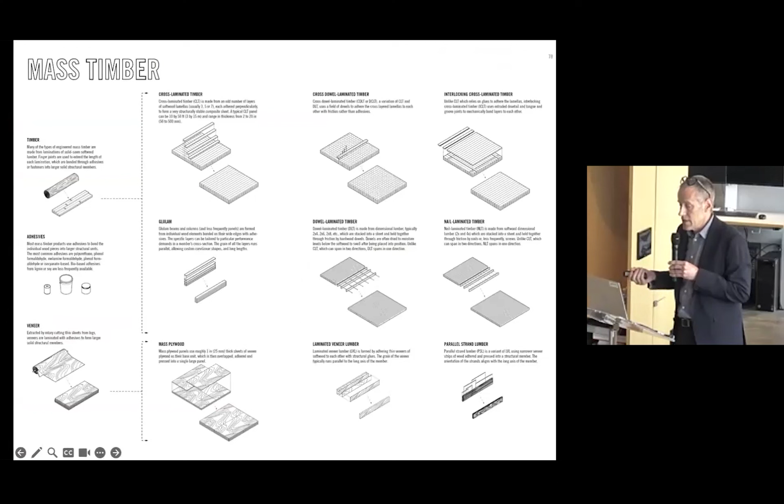While certainly requiring much lower energy processing than industrialized extractive materials such as concrete and steel, a great deal of mass timber systems rely upon adhesive. So we have to be really careful about what the adhesive systems are and how they play into questions of disassembly. This is in part why we find dowel laminated timber especially compelling, because it doesn't rely upon adhesives.

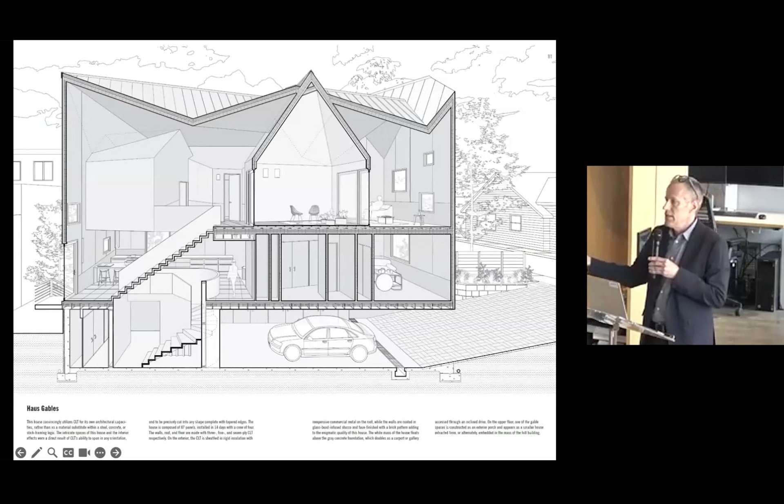We showed multiple housing projects, but we're interested in the houses that learned from the material to inform the form, such as Jennifer Bonner's Haus Gables, where the very shape of the house is driven by the use of the CLT, rather than a substitution model of replacing one thing for another but making it look like the previous material it substituted for. In this case, 2 layers of CLT produce an enigmatic enclosure, a double skin system.

That actually doesn't rely on insulation for its thermal capacity—it uses the air between the double skins of CLT.

Now, in this case, we're also calculating from the house the amount of sequestered carbon, looking carefully at where that is. After working on that book for 4 years, we were interested in designing our own projects, and I'll show one of them here, looking at the kind of opportunities that come from bio-based building materials.

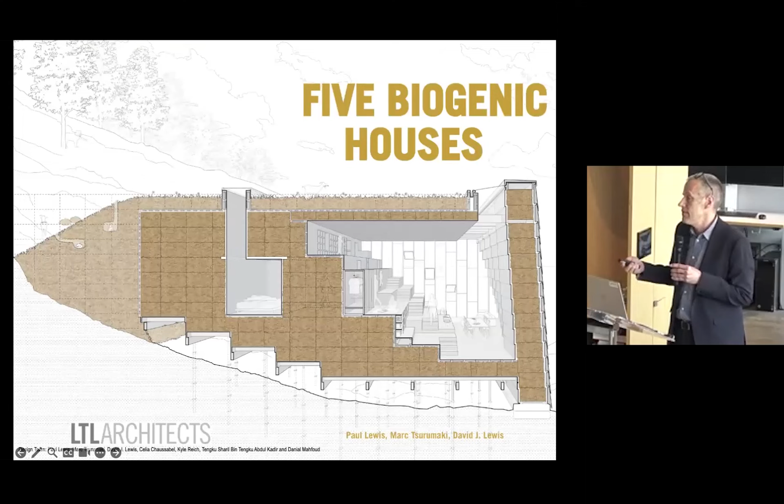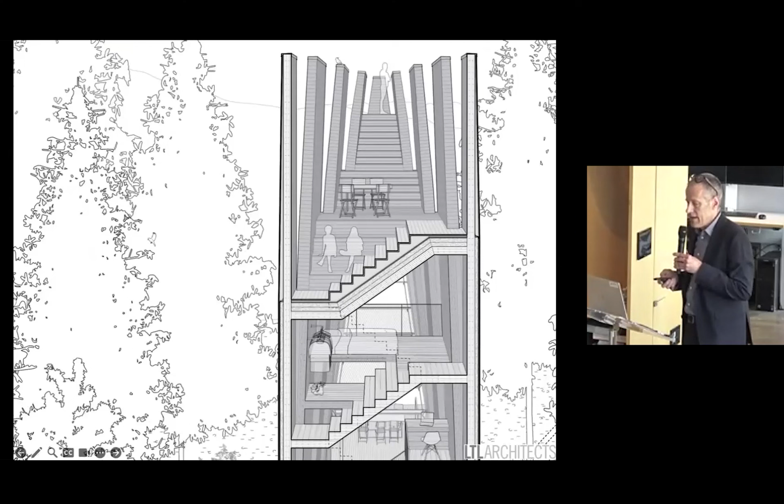In this case, we're interested in using the CLT blank, the very long and thin blanks, but how could it generate a form for a very tall house? So we're using 10-foot by 50-foot minimally tooled CLT blanks, where at the rear of the house they go straight up, housing the stair core, and at the front they taper to produce the iconic A-frame, creating basically a super tall house in the sky or in the forest where you can see the sky and the tree canopy, and on the inside really exploit the qualities of the wood.

In part, trying to figure out a building system that could use as much wood as possible, from insulation to interior to the materials of the finish.

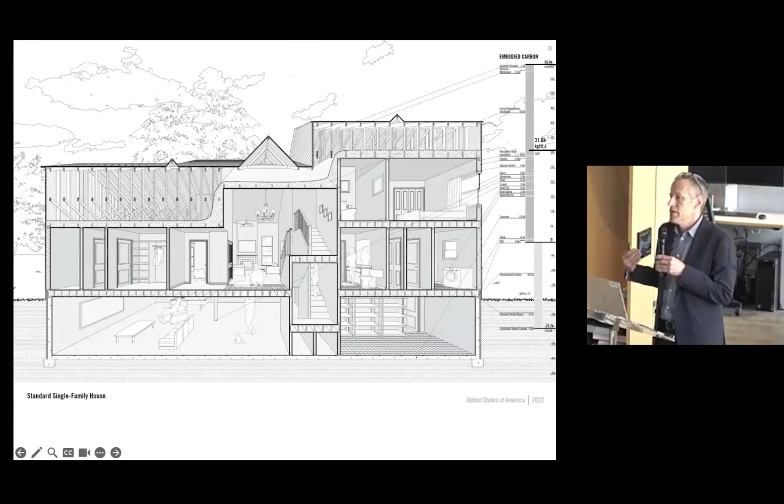One of the critiques of the building is, why houses? There's no question that the issue of housing leads to land use practices that we need to move away from. On the other hand, houses are a space for innovation, a space for being able to test and verify things. It's also the place of huge waste in our current construction industry. Most houses are demolished after 61 years, and the total amount of carbon used to build North American houses exceeds the annual carbon of many countries, including Finland, Sweden, and Denmark.

The other issue to note is that current contemporary houses are really big. They used to be 1,000 square feet; they're now 2,500 square feet. So all the houses in the book were much smaller, arguing that you can't just look at counting carbon—you actually have to look at material resources as critical to the project.

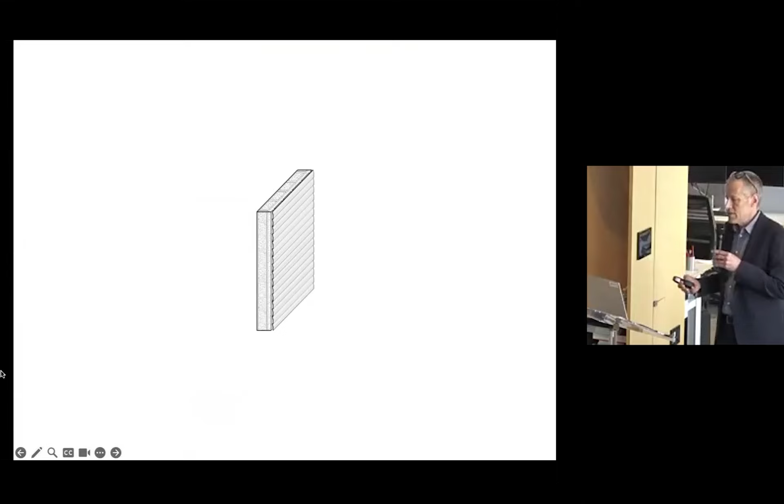But if you drill into the nature of the wall—and this goes to the argument about what the materials can do to change the way we think about architectural practice—most contemporary residential projects are made from a sandwich whose only visible presence is paint and vinyl siding, made of multiple cheap, lightweight, thin, single-performing, hygienic, sterilized layers with a strict binary between exterior and interior.

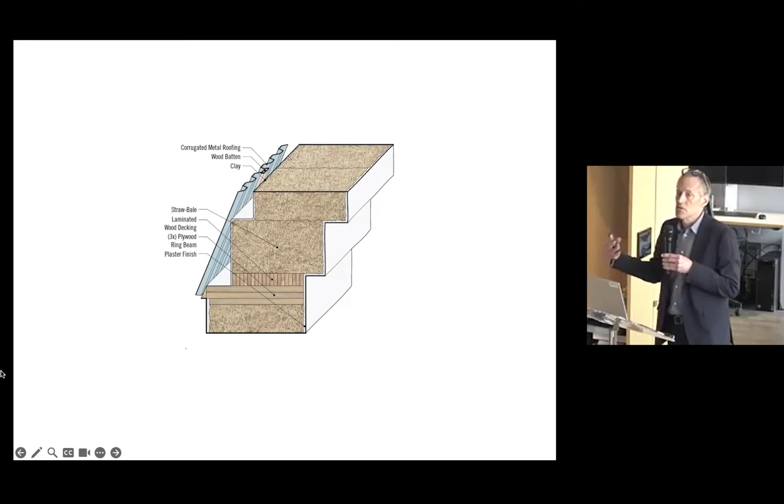We're interested in pursuing something very different: how can we radically rethink through plant-based buildings, monomaterials, thick, healthy, regenerative, where the thickness is embraced in part because of its architectural properties, its thermal properties, and its carbon sequestering capacities.

In this case, I'll end by looking at the complementary materials in addition to timber that one needs to address the earlier question Alan raised about how we get to a sustainable regenerative practice. I'm going to argue that straw is one of the key materials, in part because it's a ubiquitous agricultural waste material—you don't have to displace any farm food crops to use it.

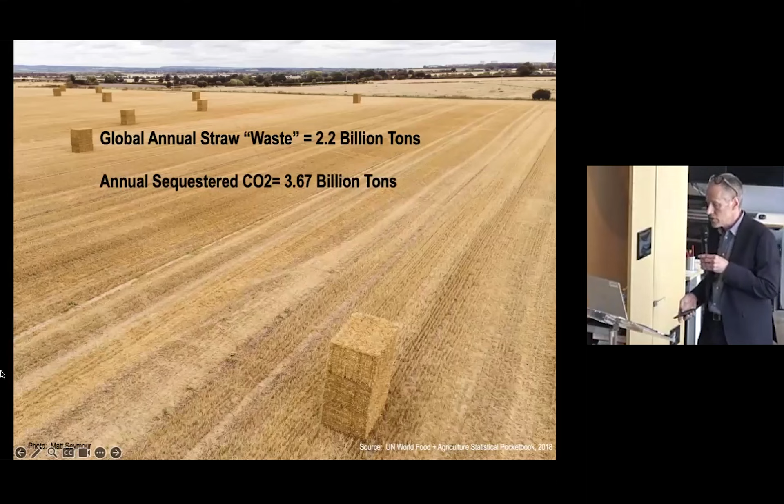Currently, there is an annual waste of straw, after the kernels of food are taken away, equivalent to 8% of all annual carbon emissions. 8% is wasted in some form. This is sitting there—it's low-hanging fruit to turn into building materials, and it has been used in building materials throughout cultures.

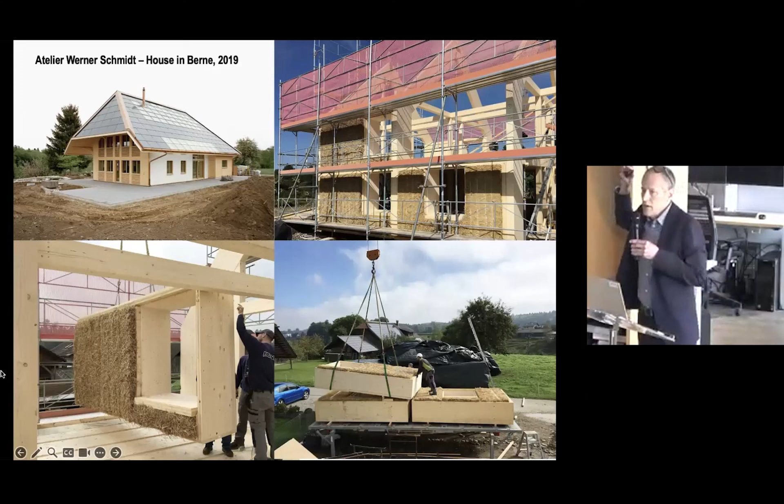Recent projects by the same office look at the combination and hybrid of mass timber and straw to produce monolithic prefabricated cassette walls for speed of construction. This is not returning to the original form of building out of straw—it's actually using new technology to advance how we're going to build at speed, at scale, and at size. A multi-story housing project being completed just this year uses timber and straw.

This is an area that needs more work to accelerate, to take advantage of the waste material, but it's part of a broader framework of reimagining what we need to do to be able to get to not only zero, but get to a truly regenerative practice, coupling mass timber with urban forms, with architectural forms, with a change in the way in which we conceptualize architecture.

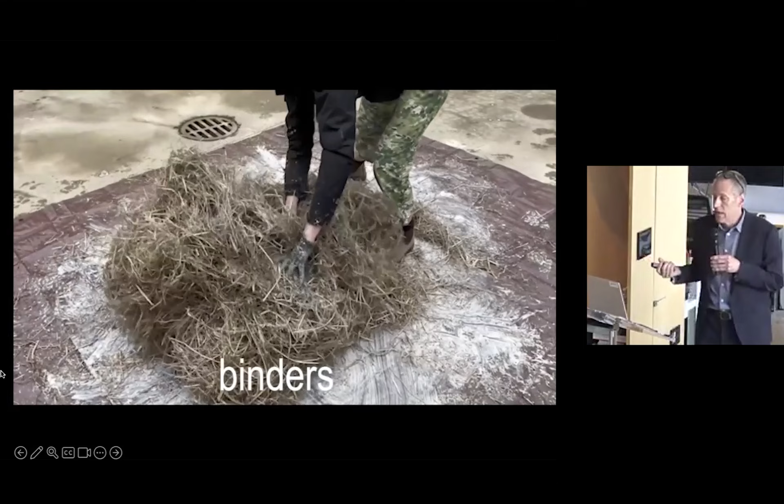So in the end, I'll end by showing a brief summary of recent research by LTL architects, working in collaboration with graduate students, many of which are at Princeton, as a way of opening up a discussion, arguing for an embrace of diverse palette of biogenic materials, of which timber is indeed part, but not the only regenerative material that we need to quickly embrace to transform how we inhabit this earth.

Thank you. Fred, we have you. There you are. You're going to overlook David's shoulder, I'm afraid.

I don't know exactly how you feel like you're going to interact with this simulacrum of Fred there, but let me introduce Fred Bernstein, who many of you know and read all over the place. I counted on his website the number of publications, mostly architectural, in which he's published, and I think I counted 67. I don't know how accurate that is, but it is many, many.

But I think most of us are most familiar when we open the New York Times or, well, the webpage. I still open the paper. When some famous architect has died, Fred is almost always eulogizing in the obituary. So he has an admirable and intelligent way of summarizing the architectural meaning as well as the content of people's careers. But we know that more recently, Fred has been particularly obsessed with the question of embodied carbon.

And so that's why we invited him to be the commentator today. So Fred, I'm going to just let you take over and ask a few questions. And if the technology doesn't work, fine, I will intervene or translate to those present. But knock wood, so to speak. Fred, take it away. Thank you.